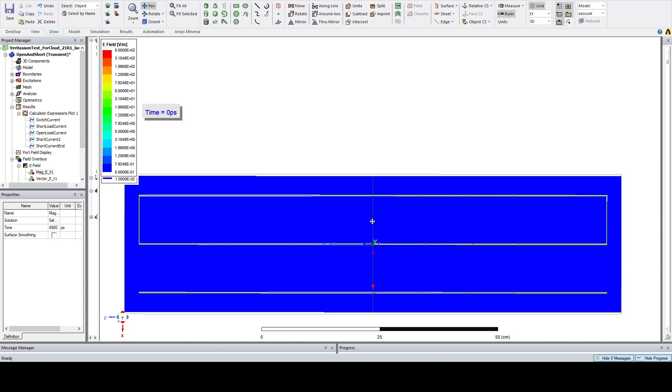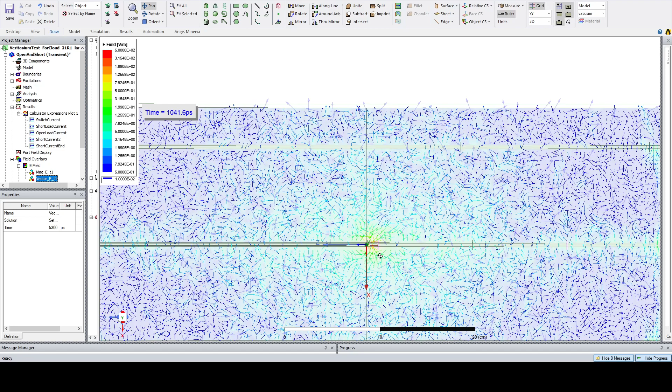I'll go ahead and play this here. One note that's different on the setup: with the previous simulation, a comment I saw a couple times was asking why, when we looked at the vectors, we didn't have basically any electric field vectors prior to the switch closing. The switch closing wasn't the start of the simulation, it was like 200 picoseconds after the start, but we had nothing, not even zero values there, and that was a result of the way I set it up.

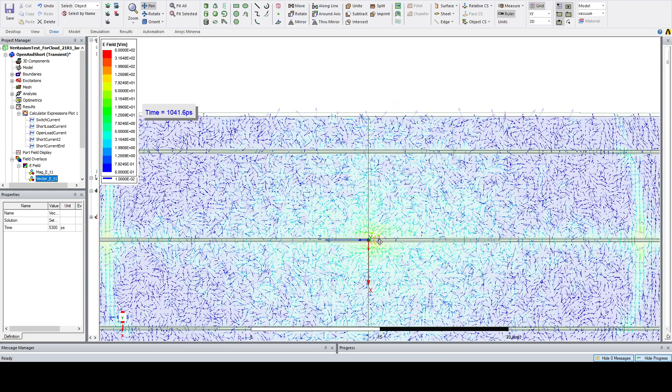So I actually corrected that, and you can see this pulse is establishing the fact that we've got 1 volt on this side of the source and 0 volts on this side, and that initial state is propagating outwards and establishing itself. You can see that's a single pulse, and it bounces around for a little bit, so I don't have the switch actually close until 5 nanoseconds here.

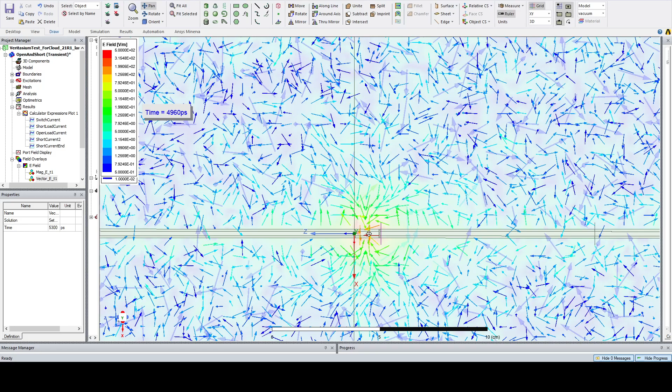You can see it's still doing some settling down by the time we close the switch, but it's more or less settled. Just before we close the switch, you can see both sides are positive, and the direction of the vector is pointing inward towards this one little section that's at 0 volts.

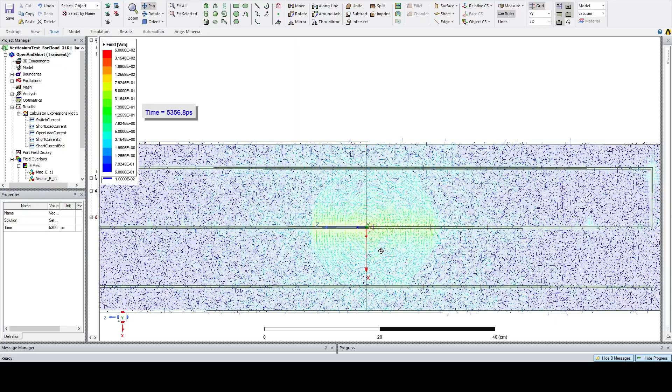So now when we have the switch close, you see very similar propagating of the electric field. We can see the directions of the field there, and then it reaches the ends and kind of rounds the corner, reflecting back. Kind of an interesting thing to see.

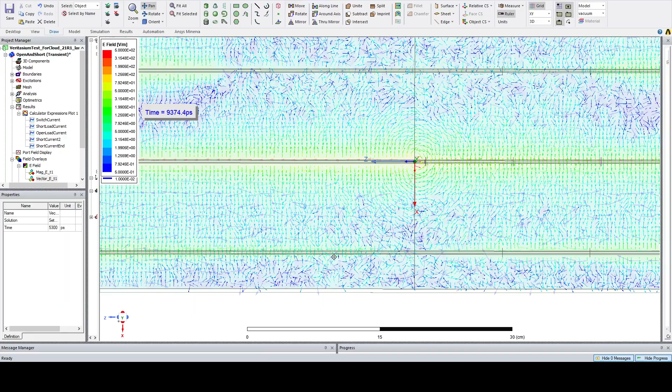We also see action going on down here at this unconnected wire, which looks slightly different, but more or less the magnitude plot and the vector plot tell the same story as before. So I'll move to the things that are new, and the simulation continues to run — I'll fast forward it here, but again nothing totally unique.

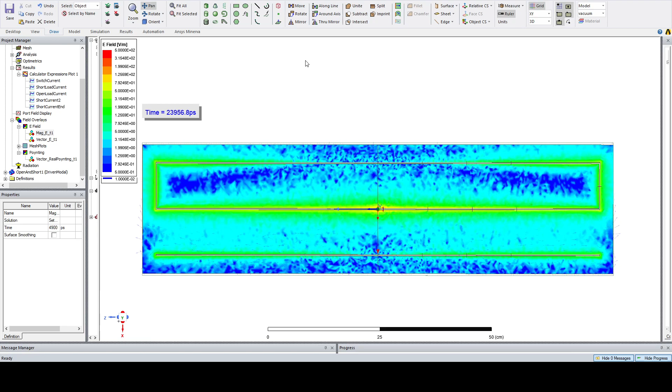If we go back to the very beginning, we can look at the Poynting vector, which everyone was curious about. Again, this initial pulse is establishing that there's 1 volt here and 0 volts there. It's interesting, you can see the wavefront here — the Poynting vector is pointing to the right and to the left, so you've got this energy propagating outwards along these lines, kind of in a transmission line fashion.

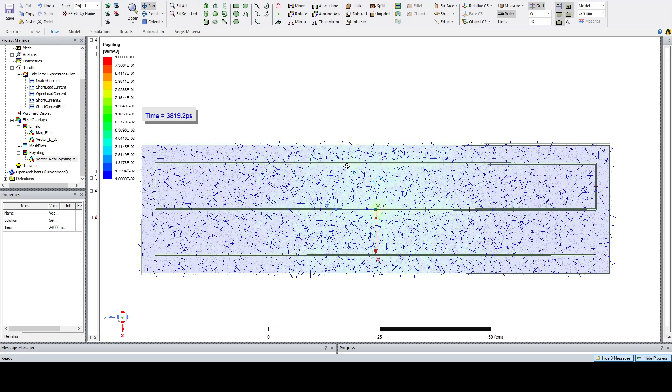Then they hit the ends and bounce back, and at that point there's not any clear energy flow in one direction or the other, which is good because the switch hasn't closed yet — that's just establishing the statics prior to the switch closing.

So now you see the switch close, and you do see a general outward radial direction of this Poynting vector, but of course we can see a very strong component parallel to these lines, both for the connected and unconnected case.

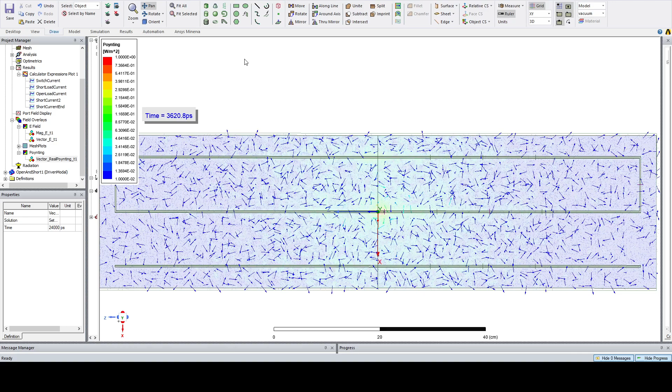If I rewind it a bit before it hits the ends there — this is a little antithetical to the point Veritasium was making, that the Poynting vector just points from source to load. In this case, you've got these really long transmission lines, so you are going to have a good chunk of energy flowing down those lines. But of course, we know that the load still does get current.

So I'll go ahead and let that play. You can see, once we get this reflection, it starts to look different — the space in between the wires looks very different than the unconnected wire down here.

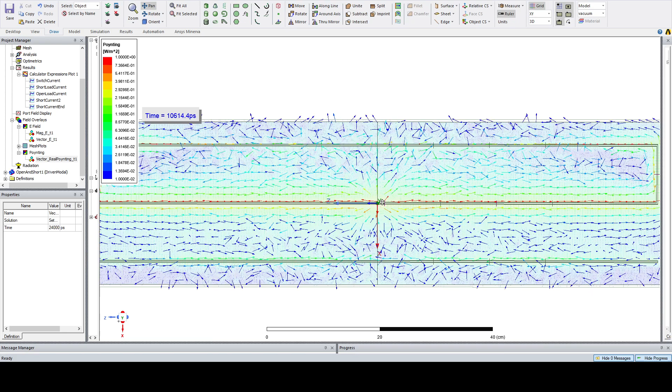You can see the magnitude represented by the color — we have more energy flowing close to the wire rather than in the space in between. So that's another interesting thing, that it's certainly guided by the wire. I'll go ahead and fast forward this a bit, as not really anything else unique happens.

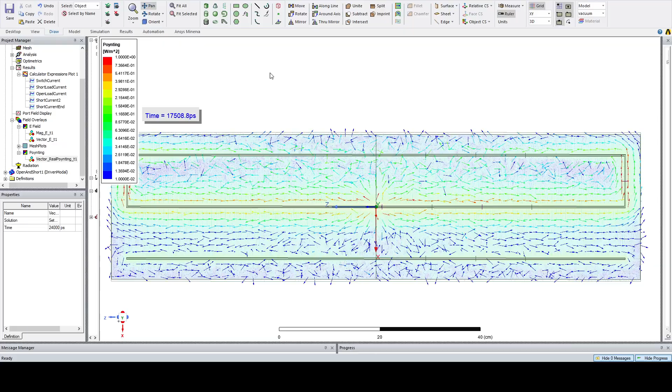So we can go ahead and take a look at the current plots, which I think will be much more informative than the last time. I included a few more current sensors along the lines, and so that's restarting.

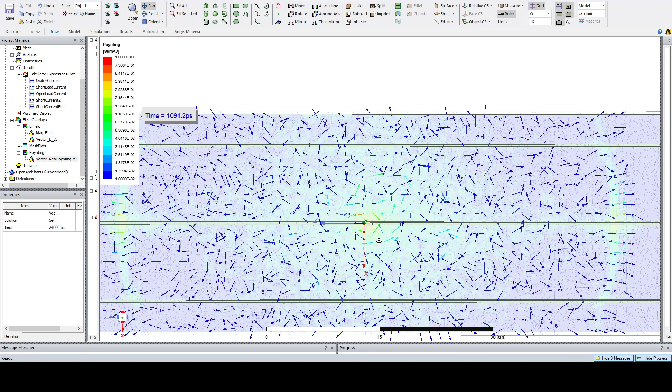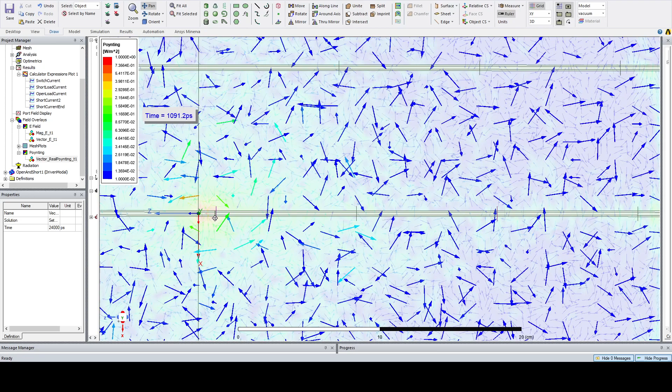Just to point out before we go into those plots, I've got this thin line here at the source detecting the source current. I've got another one out here detecting the current as it reaches that point.

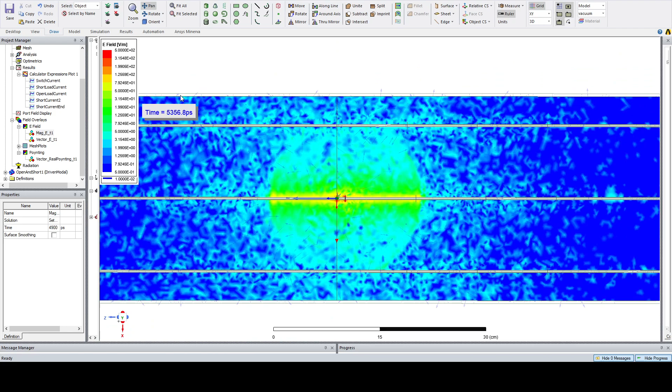So if we go ahead, we can talk about what we might see as the electric field magnitude plays out. Initially we'll see the source current, and around this time we should see the load current at the top and bottom, but not yet the current at this probe here. Some time after that, we'll see the current at that probe, and eventually current at the probe right at the very end of this shorted case.